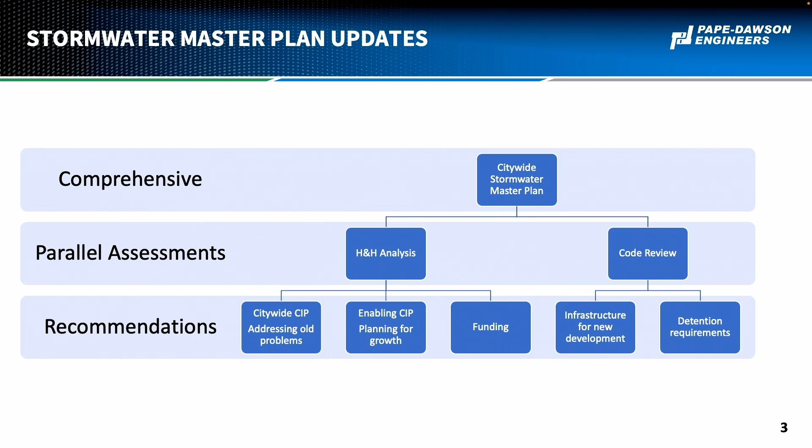But then the bulk of our work was with the actual H&H analysis itself, so that we can address old city problems, put together an approved CIP that can help enable growth, and then can work towards funding. All right, so the method of the H&H analysis varied based on where we were in the city. We looked at issues today, existing conditions, a 10-year build out, and then fully to ultimate conditions.

We identified what for the city of Corpus we called PMAs, or potential mitigation areas. They may be called damage centers or risk areas, depending on what community you're in. But basically, if we say PMA, we're talking about the areas of town where something is apparently at risk today. We'll talk about how we rank those PMAs based on structure flooding and roadway flooding, and then how we develop the capital projects from there.

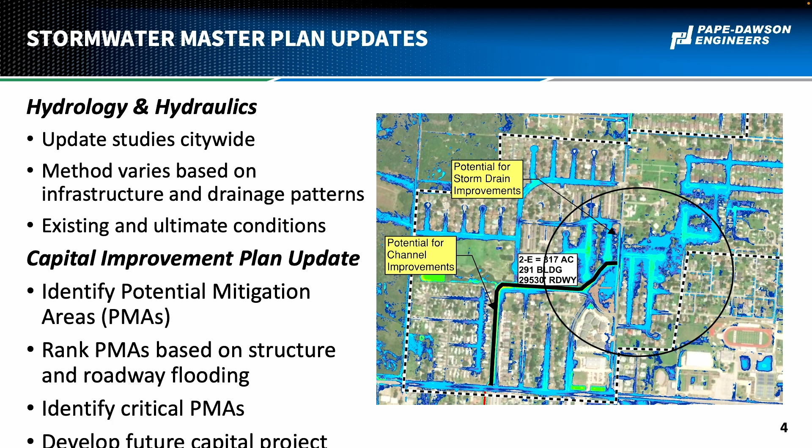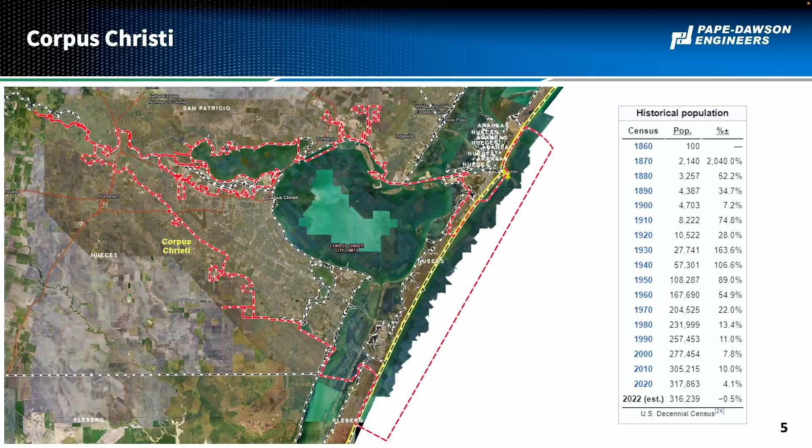Corpus Christi, y'all have heard all about Nueces County a lot today, but there's been pretty healthy growth through the city throughout its history, but that growth has slowed down since the 90s or so. The exact source of what the current growth rate is varies based on who you ask, but it is lower than some of the other cities of its size in Texas and across the country. Over the last few years, and COVID kind of created a hiccup there, but the average growth rate is somewhere between 1% and 2%, 1.6%, I think is where we looked at.

But part of the plan, and these specific percentages are more important for the water, roadway, and wastewater discussion than they are stormwater. But not only do we look at citywide what that growth rate was, but how it broke down by area development plan. And then we looked at data from the MPO and information that the city had and that TxDOT had as far as the changes in trips.

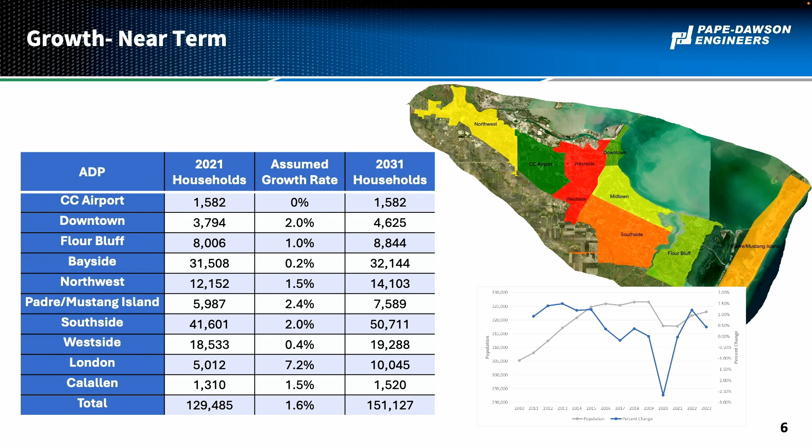And then we coordinated that with the Capital Improvements Advisory Committee, or what we call CIAC. So the CIAC is an appointed body, appointed by the city leadership, that helps guide the process of developing a master plan and developing impact fees. And we went through piece by piece and ADP by ADP to agree on what was a generally acceptable percentage of growth for those areas.

All right. The city is broken up into, I mean, you can carve it up a number of different ways, but we looked at a few different areas. So we've got the downtown area, which is in that darker green area, which we modeled separately.

Actually, we'll start with Oso Creek. So Oso Creek, which has been talked about and what Mr. Hinojosa just asked about, is mostly undeveloped. A lot of the watershed is actually in the city's ETJ. There is some mixed development out there, and there's some infrastructure, but usually it's in the form of ditches, bridges, or culverts. There's not a lot of underground storm drain systems.

Downtown is this dark green area. It's pretty much built out. There is a pump system downtown that gets water over the seawall when it's needed. And then we've got the areas down at the island where there is some development and some infrastructure, but that area is dominated by storm surge.

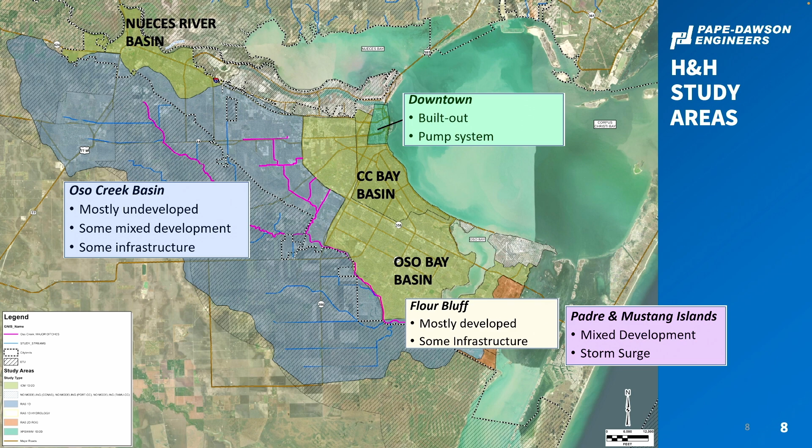Flour Bluff was looked at separately. It is mostly developed. There is some infrastructure, but it doesn't function like the rest of the city because there's not really a riverine component. It's just kind of a bluff. And then the rest of this is Nueces River Basin, Corpus Christi Bay Basin, and Oso Bay Basin. This is the area that is mostly developed and has a lot of underground storm drain infrastructure. So that's how we carved up the project on how we were going to attack the analysis.

And so we used different models. For the Oso Creek Basin, we used HEC-RAS. We used a 1D/2D analysis so we can look at the flow through the creek, but also the overland areas. For the downtown area, we used the XP-SWMM model. That was used because the city already had an XP-SWMM model for that area, and we were just updating it to take into account the new Atlas 14 rainfall.

Next area is down here in Flour Bluff, where there's less infrastructure. We used the rain-on-grid RAS 2D, which is basically just treating the surface like a grid and how the water flows through. We actually ended up confirming a lot of that with our ICM model.

And then for the rest of the area, we used an InfoWorks ICM model. The reason we did that is because that area is, of course, very flat, but there's a lot of underground storm drain infrastructure. Some of it is looped. Some of the outfalls are below sea level. So it's a very complicated system model.

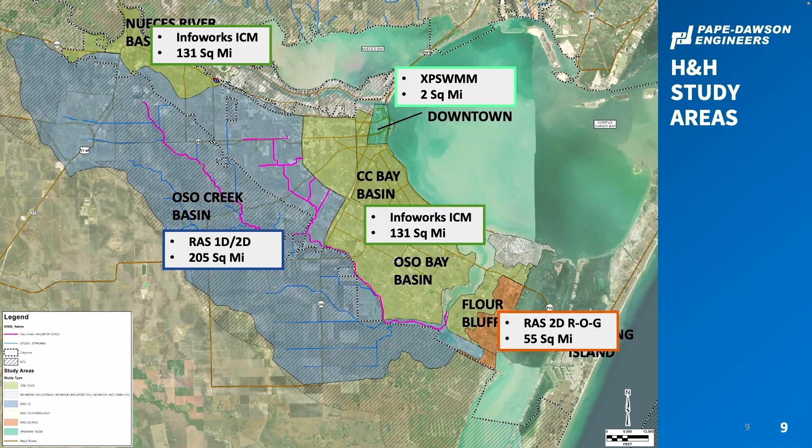In general, we prefer to use the readily available, publicly available models like HEC-RAS, but sometimes, like in this case, we've got to use some of the more advanced systems that are proprietary. So we used a combination of those to best fit the city. And understand, this is a large city with a big ETJ. All of this is scalable. So if your total city is 2 square miles, a smaller version of this can be done. And as other consultants have shown, this can be extrapolated to larger river basins like the Nueces River Basin.

The soils through here are predominantly clay. The purple means clay throughout the entire city, the exception being the island and Flour Bluff, which are of course sandier.

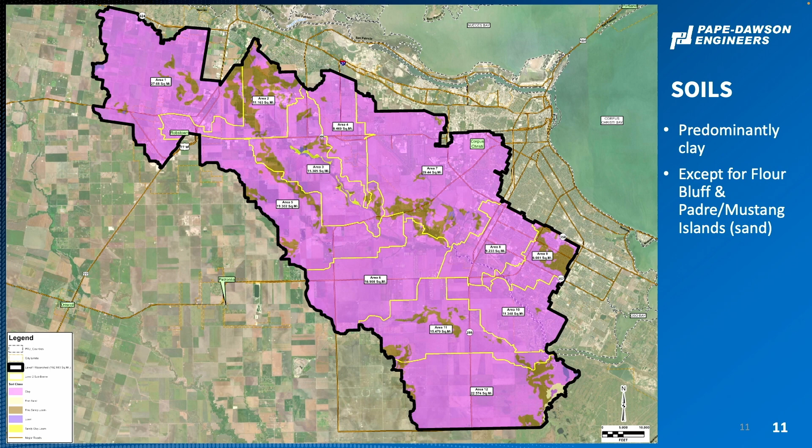We talked about the land use and the growth percentages assumed earlier. For stormwater, we were less concerned about the percentage of growth and really just looking at the assumed values for the current state of development, future development, and ultimate development. And so we started with existing land use. So we did 2 things.

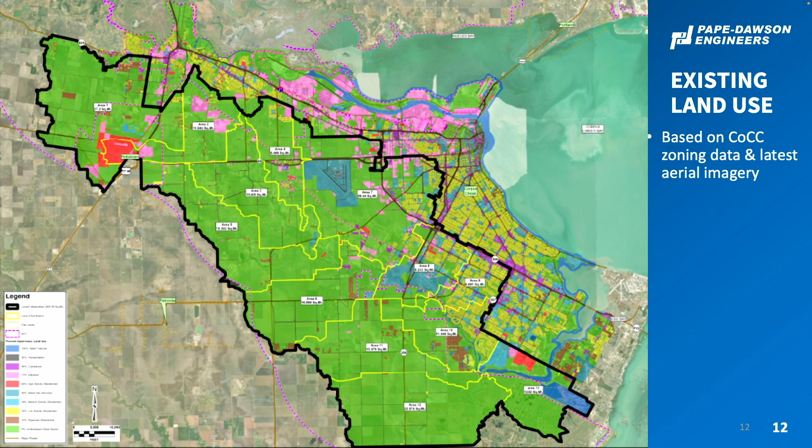We took the city's zoning data, and then we compared that with aerial photography, and where there was zoning that wasn't apparently developed based on the aerial imagery, we took that out and developed this existing conditions land use. This green color that you see is just undeveloped through most of the Oso Creek watershed.

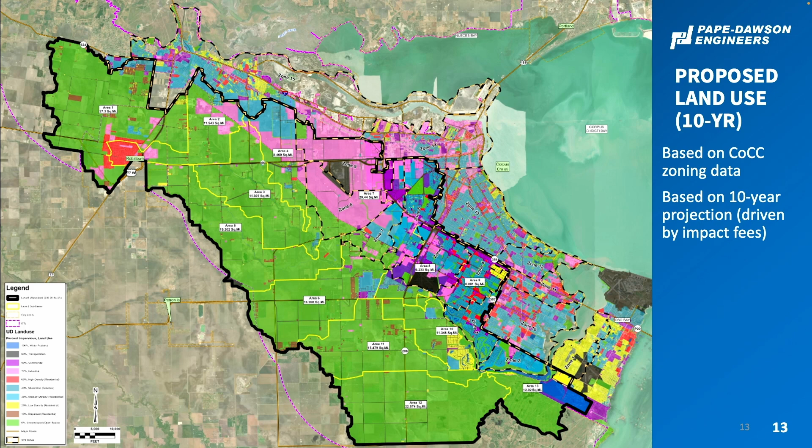The proposed land use, we basically said, well, we need to look at a 10-year proposed land use condition. The reason that we picked 10 years is because that's the time period that's used for the impact fee calculations. So the impact fee is intended to support development or growth over the next 10 years. And so we had to make an assumption of kind of a snapshot. We said, well, we'll just assume that the zoning map within the city limits is the projected 10-year development. And then we also added a few areas that we knew there were some developments coming online through plat data and things of that nature.

Now you might ask, well, what happens if we're over or under on our estimates for the land use? How does that affect the fee? When we get to that, it really doesn't matter for stormwater because it's all about dollars per acre, dollars per square foot of impervious cover. So if the actual growth rate fluctuates more or less than what we projected, it doesn't really affect the rate. It just affects the amount of fees that would be taken in over that amount of time.

For future land use, we did a few things. We looked at some of the corridors where we saw some different commercial and industrial development coming in. We saw some denser residential areas coming in here. We plugged those in where we had a good idea of what was coming. And the rest of the area, we just considered mixed use, which is, I want to say 95% residential, and then a mix of other things. There are some areas, large green areas like the tip of the King Ranch down there, where we safely assume that there's not going to be much development.

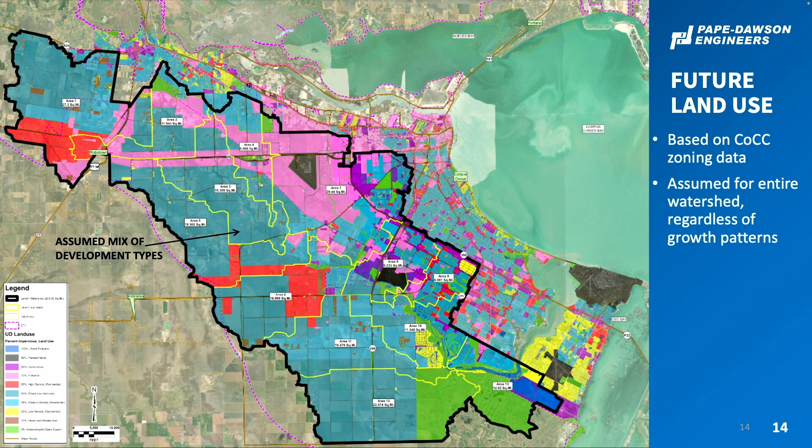Let's talk about how we got to the potential mitigation areas or the damage centers. First thing we did when we met with the city and started our modeling is we wanted to do a high-level analysis. So we did a 2D rain-on-grid analysis of the entire city. We also did this for Flour Bluff and the island, but I just wanted to put one exhibit up here. This is assuming just the topography and no underground storm drain infrastructure. So this is very conservative.

The point of this was to be able to print out a big layout, sit down with staff and say, okay, does this make sense with what you've seen? You guys deal with the calls and the issues of closing roads. Do these areas that show the deepest flooding make sense? And so you went through and said, well, yes, this one makes sense, but there's the pump system here. This one makes sense, but TxDOT's got a project. And so this was just a tool that we were able to model the entire city very quickly, like I said, as a first sniff test.

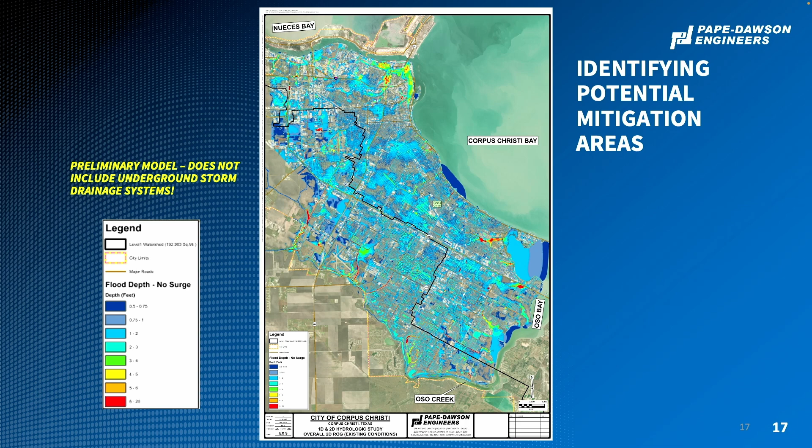As we went through iterating and refining our models, we had to figure out what was the level of risk that we were going to quantify. So the first thing we modeled was the 100-year floodplain, period. So whether it was an inch of water or 6 feet of water, we just counted what all was inundated. And what we found is that when it rains, there's water all over Corpus. And even when we talked to the stakeholders about whether we should take into account a foot of flooding in the roadways, it kind of got chuckled at, and they said, well, that's a pretty decent rainstorm. Maybe let's bring that down so we're not counting so many structures.

So we went through and we looked at different options. We said, well, we can look at a 100-year storm. We can look at a 10-year storm. And instead of looking at the inundation of the entire floodplain, maybe let's truncate that to a certain depth. So we looked at only counting the structures that might be flooded when there's 6 inches of water, and then only counting the structures that might be flooded when there's 12 inches of water, which is what we landed at. We landed at what we call the 10-year 12-inch, which is not a design storm. It's just a way to count structures that are potentially at risk.

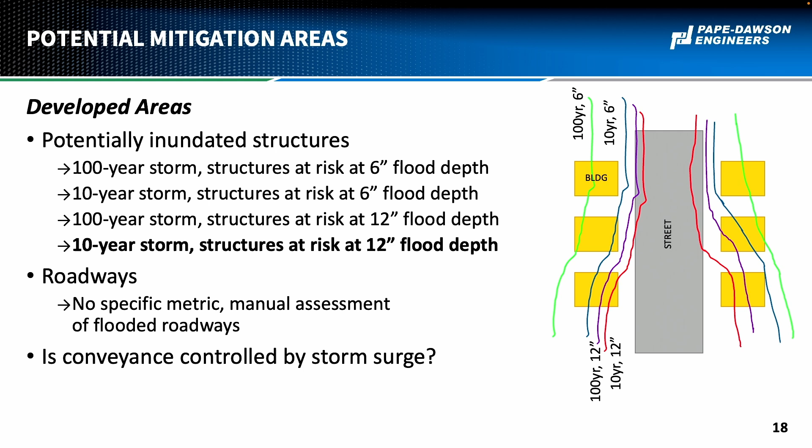And so you'll see some maps later where we'll have some dots on parcels or structures, and that is what's counted there. Now, each community can set their own level of risk here. What's important is that we had a defendable, agreeable metric so we could say, here's the number that we're counting for structures.

If you wanted to make this the 5-year or the 50-year, you would have the same type of metric. On the roadways, we didn't look at a specific metric for flooding of this depth over a lot of time. But when we looked at our modeling, we looked at areas where there was road flooding, and that road flooding might be improved if there's some infrastructure added. So this was kind of a manual assessment. And then we looked at areas to determine whether or not they were controlled by storm surge.

So I want to clarify the 12-inch depth issue. This is just from FEMA's website, their standard picture that says this is a floodplain and this is floodway. And this is me being a 10-year-old drawing houses in the floodplain. So if this blue line is the actual floodplain, we looked at, well, what happens for the houses that are touched only by 6 inches of flooding?

Well, when we do that, we're basically narrowing the width of what we're counting. So if the 100-year floodplain is this wide, and we say 6-inch flooding, we're going to count fewer houses. And if we go to 12-inch flooding, it's going to count fewer houses and structures there. A reasonable question would be, why did you do that? Why did you choose 12 inches?

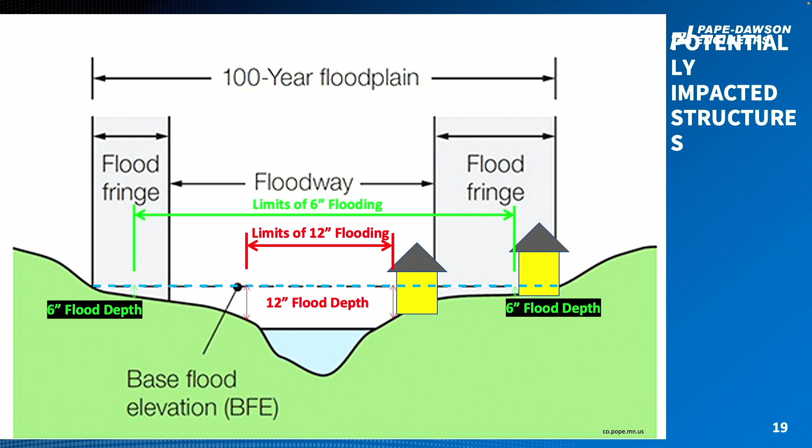When we started talking to the stakeholders about the projects that we were developing, one of the comments was, well, we don't really show any projects down on the islands or even on North Beach. And we said, well, that's true, but what we're looking at with this master plan are projects that can help reduce that risk number.

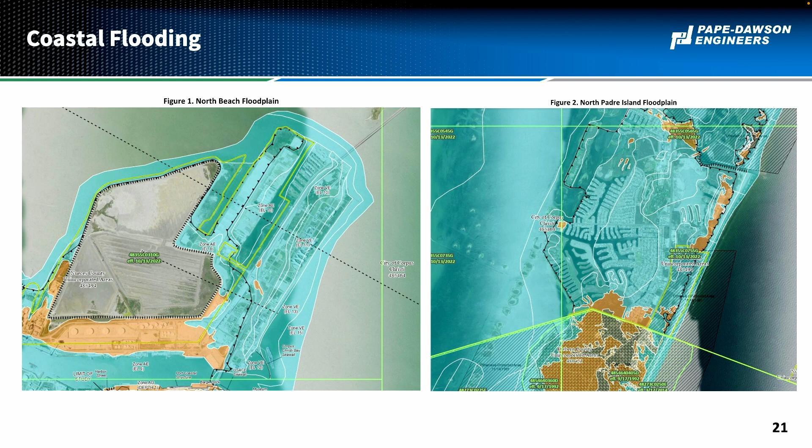And this is just straight from the FEMA maps. You can see the flooding on North Beach and on the islands is really dominated by storm surge. That is not to say that there can't be a maintenance type project by the city that can help with some of the day-to-day flooding. That's still very important. But for the scope of this project, creating a large-scale CIP for the overall city, that was just beyond the threshold of what we were looking at.

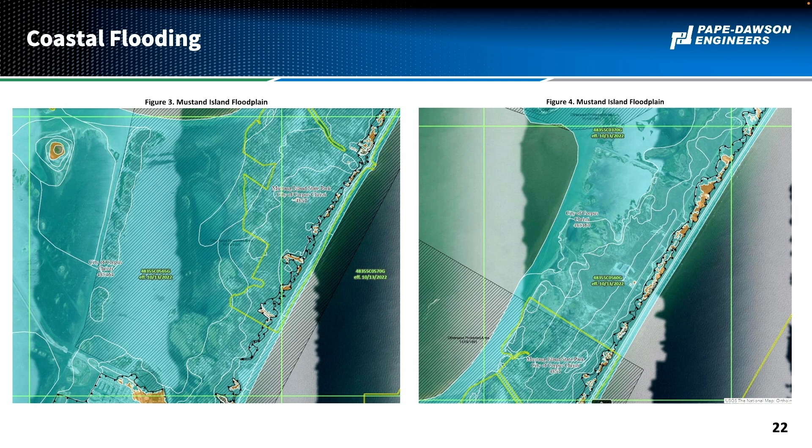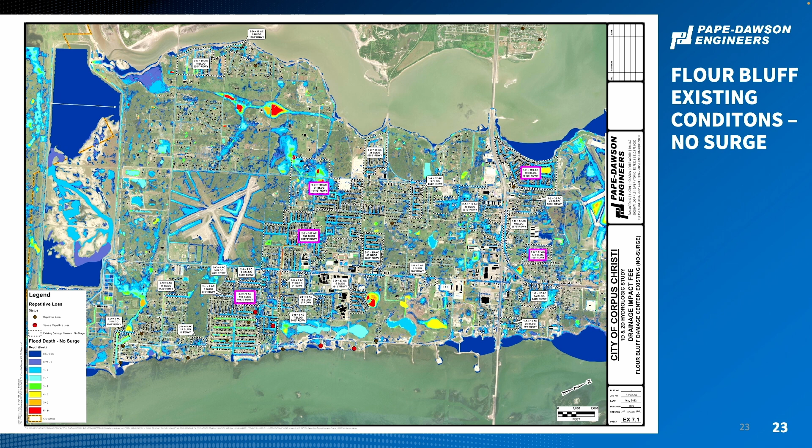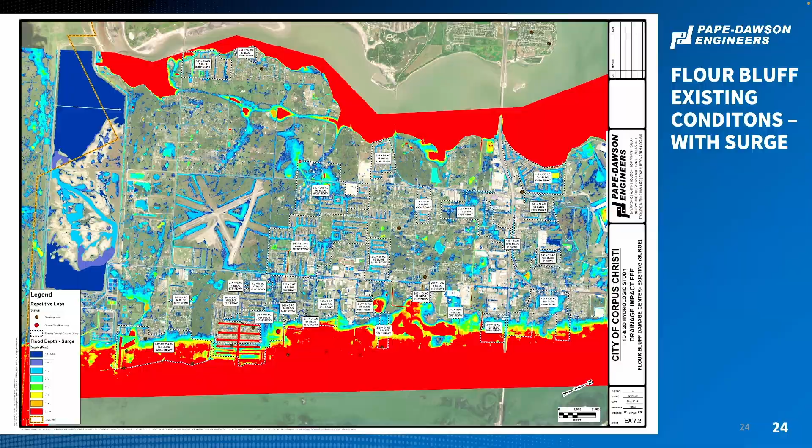And when we added storm surge, there's areas along the coastline of Oso Bay or the Laguna that just aren't necessarily solvable with a standard channel and culvert project. And so we identified that there's some areas that we're not going to be able to help with this project. And taking into account the storm surge also changed the dynamics of the actual studies for the more internal projects that we're looking at.

We spent a lot of time on our InfoWorks ICM model. We broke this up into 15 zones. There's nothing really magic about the number of zones, except that we would spend all day getting the model set up, and before we leave the office, we run, because some of them run for hours and hours, and you hope that the system doesn't twitch while that's going on. So there's definitely some reruns when we got back. So we broke these down so that each version could run within an hour or two. And that got better as we went through.

We talked about needing the ICM model because of all the infrastructure. So we got the city's GIS data for the storm drain systems. All those green and yellow pipes are the storm drains. I believe there's a threshold on the size of the pipe; that's the different colors. But the city data had about 38,000 pipes in it. And there were about 8,700 manholes and inlets that we had to account for.

We worked through, and by we, I mean Anthony Shepis, who did most of this work, went through and consolidated pipes as best we could so that we had the same length of pipe, but basically cut that in a fourth or so to get down to 8,000 pipes and about 5,000 nodes.

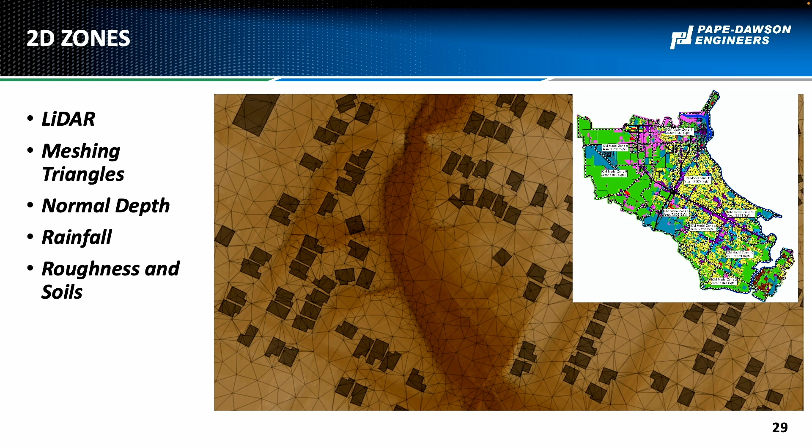And then we had to take into account the houses. There are hundreds of thousands of structures in Corpus Christi, and so we took the footprints from the appraisal district data, and we basically extruded those up out of the surface to be 10 foot tall. And so what that does is it's a conservative way to show that if the water were to touch this building, it would go around it instead of through it, which in reality, in a flood, the water would go through. But again, this creates a conservative approach.

Talk about identifying PMAs. So we've got the blue represents the 10-year storm where there's 12 inches of flooding, and the black is all the building footprints. And so we went through, and if the building footprint touched that delineation, we counted it. If for some reason we didn't have a building footprint, if the center of the parcel was within that flooding, we counted it, and that's how we got our existing condition structures.

And this is just zooming out a little bit to see, we ended up with a lot of structures counted just kind of on the southeast edge of town.

As we started, we went through several iterations of doing improvements. The first thing we did was very simple. The way the model runs, it says there is one 48-inch pipe, and it's really easy to say switch 1 to 2, or 2 to 4, or whatever it is. So our first sensitivity analysis was, let's double the size of the storm drain to see where it makes a difference. Easy check. That was not our final analysis, but it was a way to do a quick check with such a large watershed. And then from there, we massaged it and iterated it.

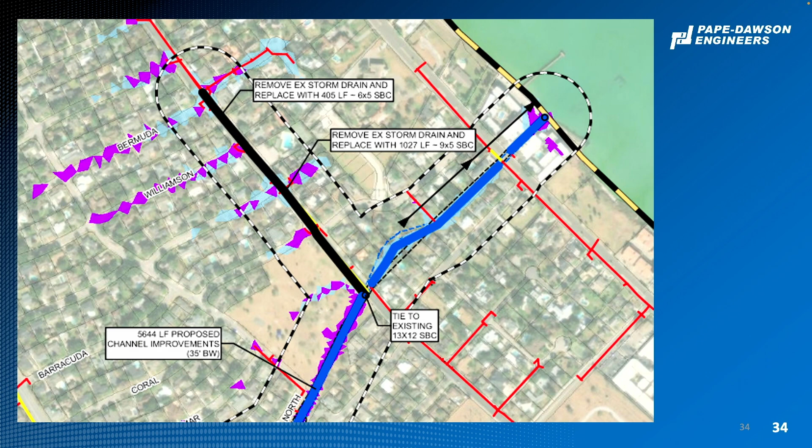Here's an example of a pretty big system that could be broken up into multiple smaller systems. So this is a channel system that runs southwest down to Oso Creek, and then some of the culvert and storm drain improvements that can be made, and you can see some changes in flooding there.

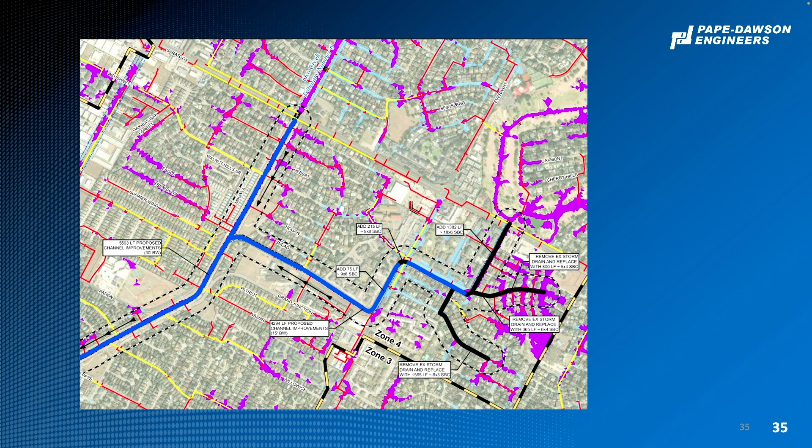And then this is another set. We had to take into account improvements around TxDOT. We've got some storm drain improvements. This actually drains to the north and goes towards downtown. With this type of situation, we made sure and put our improvements into our other models where we look at things like the downtown pump stations to make sure that we didn't add too much water to the system and have an adverse impact.

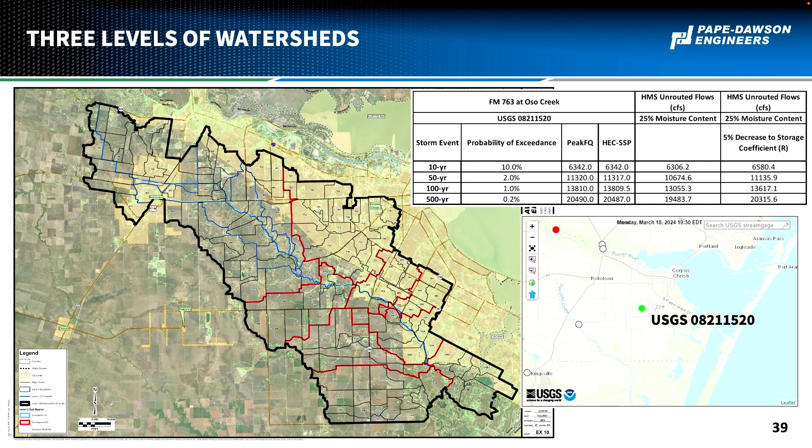When we're setting up our Oso Creek analysis, again, most of the infrastructure out there is just ditches and bridges and culverts. We didn't have money to survey any of the structures, so we used a program called EagleView. It's a subscription-based software program, really a website where you can actually measure vertical distances and areas on vertical planes.

And so you can get these isometric views of these bridges and come here and say, all right, that's about 15 feet. Now, it's not survey accurate, and it's hard. There's a point where it doesn't really work well on tiny outfalls, but it's a good way to gauge whether or not the models we're working with are in reason and what we needed to actually go field check.

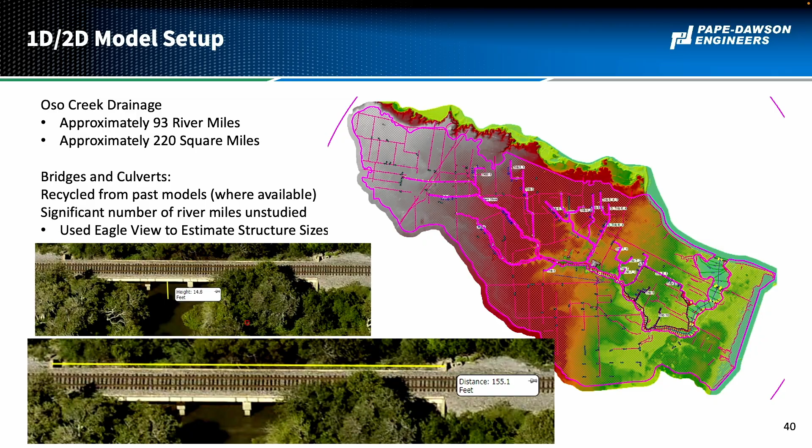Our modeling for Oso Creek, actually, this project was going on right after the AECOM pilot study. So that model was what was used as our baseline for this Oso Creek study, and then we expanded. We went into a little bit more detail with some of our crossings and structures from there.

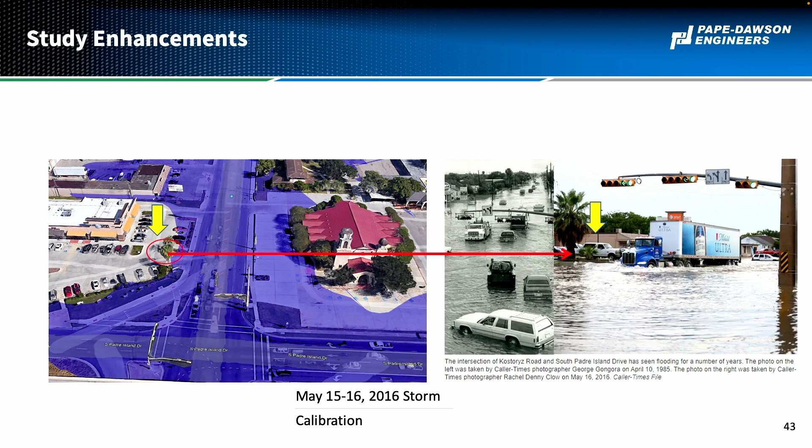What we saw when we started looking at the patterns from the hydraulics in Oso Creek is that the portion of the creek that's within the city, the developed area, gets to and through the creek in about 18 hours. The portion of the creek that is outside of the city takes about 30 hours. So that means that developed water basically gets through the creek into the bay before everything upstream.

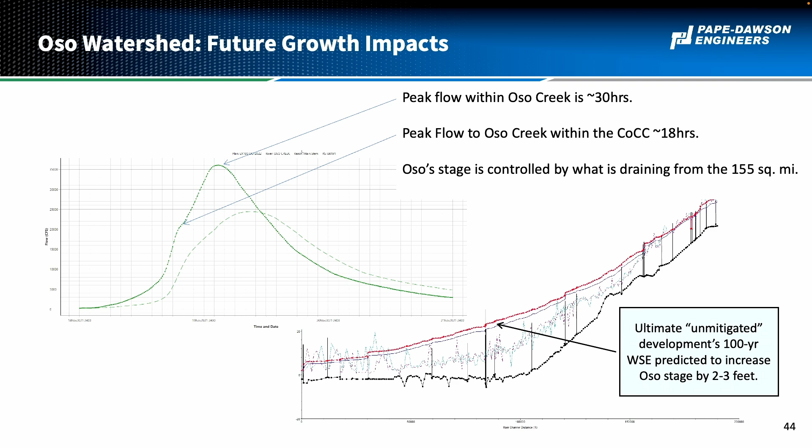So where this is important is, one of the questions with the code side was, how do we handle detention? Well, the city's IDM already says that you can't increase flow or impact your downstream neighbor. And so this reconfirmed that in the undeveloped areas, moving forward, there needs to be detention with that development.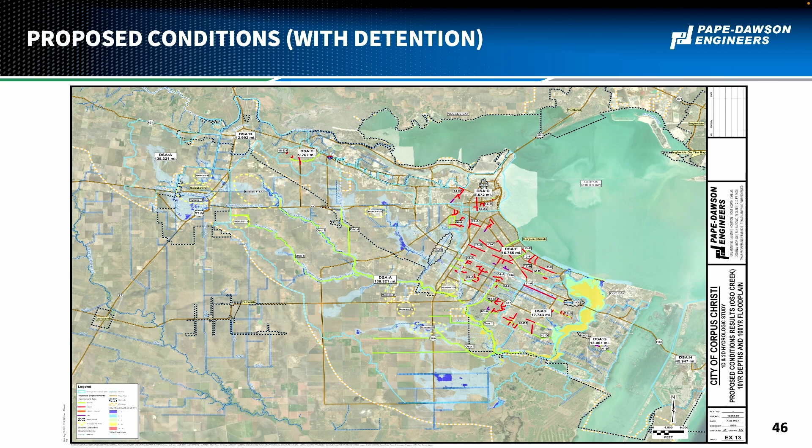The city actually recently got funding for the Oso Creek bottom rectification, which is the bottom 12 miles of the channel. And part of that is going to dive deep into the actual design of those improvements. In that, we've got to look at what are we going to do? What's the maintenance plan moving forward to make sure that the city spends this money that it got from the Water Development Board? Let's make sure that the money was put to good use.

Now, again, we started out with dozens and dozens of projects and then whittled down to 29 projects. Each of these projects could be broken down into much smaller projects. So 29 could easily be 100 or 150, however you wanted to break them down. 24 of those are in the developed areas, and then there's 5 large projects in the undeveloped areas.

One other thing I wanted to point out is that there was also the Tri-County study going on at the same time as our study, which was Nueces, Jim Wells, and Kleberg County. And so we talked to the Nueces County engineering consultant, and we heard it from city staff. They heard it from county staff and leadership that says, hey, we realize there's 2 overlapping studies. Please, let's try to do this efficiently. So we met regularly with those engineers to coordinate our studies.

And so geographically, there was overlap in our studies. But when we both said, hey, here's a project, we divvied that up to make sure, okay, if it's in the city limits, Pape-Dawson will take care of it. If it's outside of the city limits, Halff will take care of it. And that was kind of how we divvied it up.

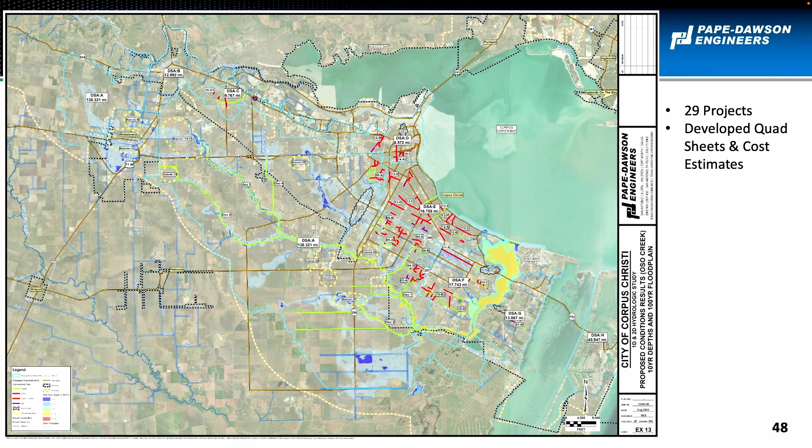A good example of that is this project here. You can't read the number, but that dashed yellow area is called Nueces 28. That's an area that the county identified, that we identified, and sure enough, TxDOT is already working on plans to bridge that floodplain. And so we pretty cleanly said, okay, the city project will be east of Crosstown, the county project will be west of Crosstown, and TxDOT's project will be Crosstown. So it was a way that the communication actually worked out.

Now, for each of these, we developed what we call a quad sheet, which I believe prints out to 11 by 17, just basically a summary document. So this is what we call the Oso 1 project. It lines up with the Oso Creek project that is now already funded. And this is just kind of a guidance document that helps the budget process that's got all your vital information.

So it's got the thick line of where the project is. It says this is this many feet of proposed channel, this wide. It's not a construction drawing, but it just lets us know what's going on. It's got a brief description of the project. We've got the council districts listed, the precincts listed, and some possible funding sources that could fund this in the future. And then we've got our cost estimates, basic construction, right-of-way, mobilization, contingency, design, and inspection, all to kind of a bottom line. And we did this for each project.

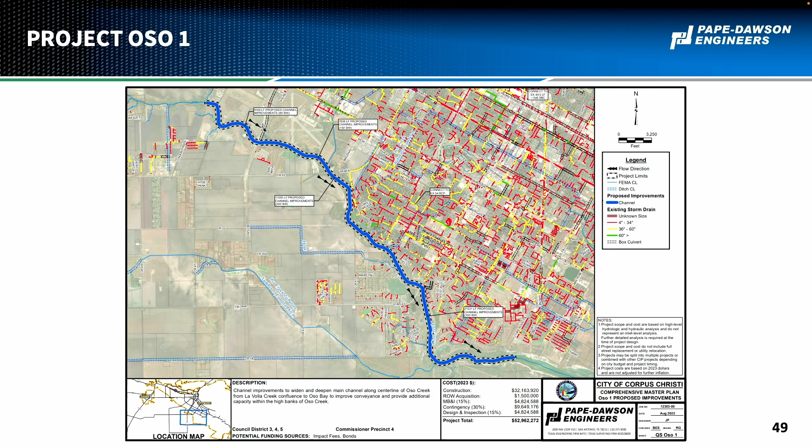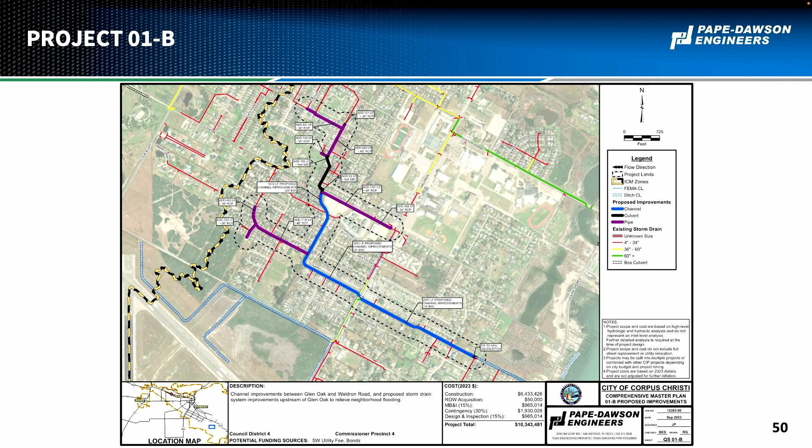This is in the undeveloped area. This is one from the more developed area. We've got a combination of storm drain and channel improvements. And this is also a smaller project compared to that other one. This is about $10 million, but again, could be broken up into smaller $1 million, $500,000 projects. Each of these got its own cost breakdown.

For that large undeveloped project, it was a very simple estimate because it really is a matter of excavation. And then we've got some standard percentages assumed for utility adjustments and things like that. Where we get into the developed areas, it gets a little more complicated because we're looking at different pipe sizes. There's more need for trench excavation protection, flowable backfill, things like that go into those estimates, right-of-way acquisition, but we did this for each of the projects.

Here is the full, geez, that's a big spreadsheet. These are the full list of projects. So we ended up with, again, 29 projects ranging from, say, $6 million to $60 million, with a total of $697 million for the CIP. So the 29 projects and the costs associated with them, these have been approved. They were approved this spring.

This dollar in no way locks the city into spending any money. It is a number there for planning purposes so they can move forward with funding as needed. And again, these projects can be broken down.

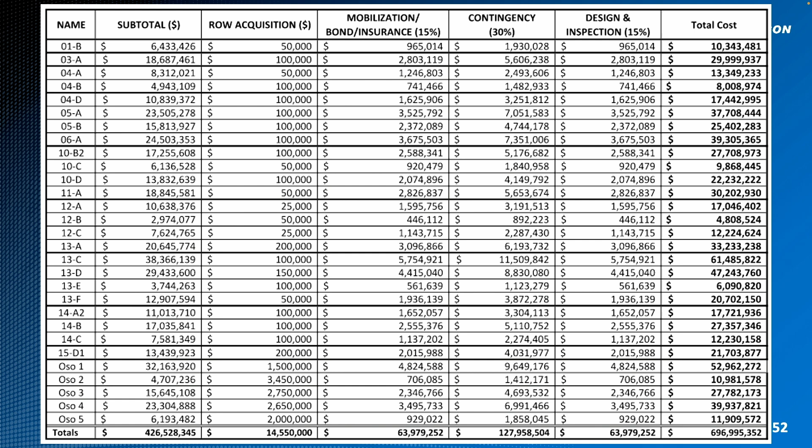We also looked at the risk and the cost versus the risk, or the cost benefit. And so we had those inundated structures existing and proposed. And we narrowed the number of structures that we counted to only where there was 12 inches of water. So that's why these numbers are in the hundreds and maybe not in the thousands in some areas. And then we just ranked them: basically take the dollars, divide by the reduced risk, and that's how we rank those projects. And these are the 24 projects within the city developed area.

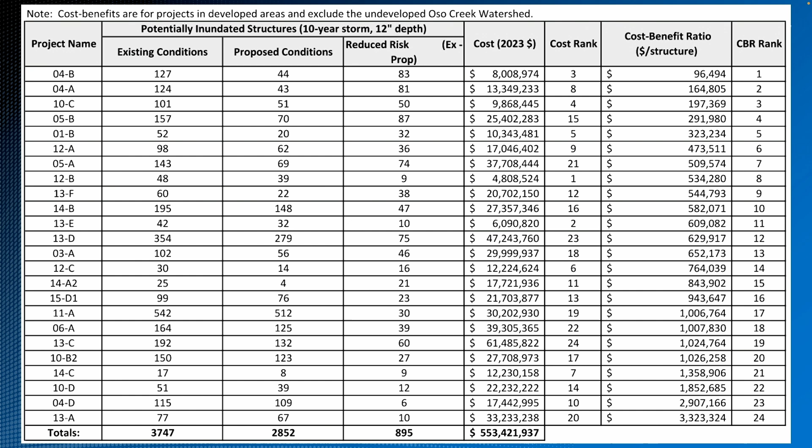The 5 projects here are the ones in Oso Creek. These are the ones that are dependent on development, and these 5 are the only projects that we used for our impact fee analysis. So those 5 projects totaled $143 million. If you don't have impact fees and you're implementing impact fees, the state has guidelines about what portion the city can pay, what the burden on the developers is.

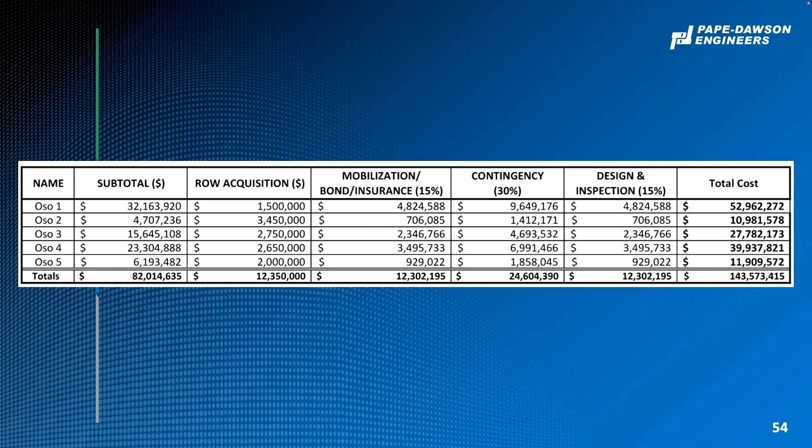And so there's a couple different ways to do it. The simple way is that when we start our impact fee calculations, we take this total number and we divide it by 2. And so the project cost is $143 million. When we step into the impact fee discussion, we divide that by 2, it's about $70 million.

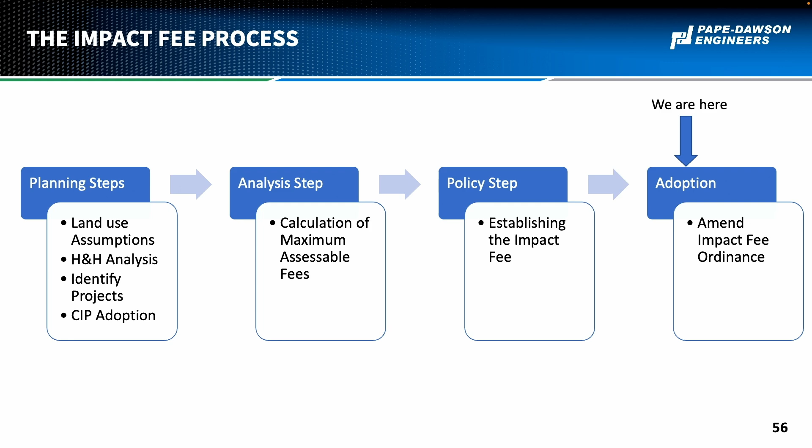The impact fee process starts with all the planning that we talked about, the analysis that we've done, the policy for establishing the impact fee that we have worked on. And when I say establishing, I mean calculating, and now we're in the adoption. So the impact fee has received a recommendation for approval from SEAC with some conditions. We're now going through public workshops. We met with Planning Commission last week or 2 ago, and council is next. And so we'll work through that so that we can hopefully get to an adopted fee.

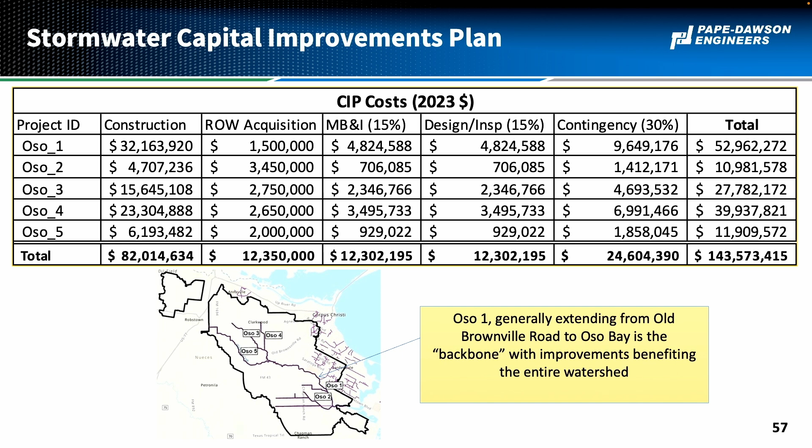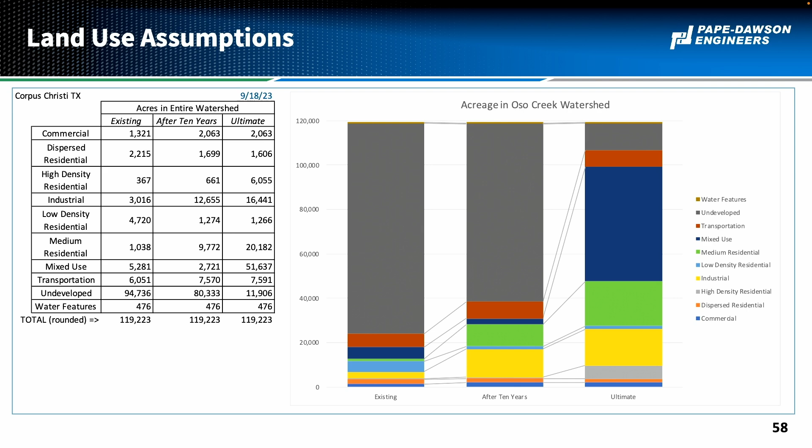So you've seen this number already. Take this 143 divided by 2, and that's your numerator. And then we convert the land use assumptions that we did into impervious cover, so concrete, rooftops, pavement, and that is your denominator. You take your dollars divided by impervious cover, and you end up with an estimated fee. We looked at different options, and I'll just kind of flip through these.

The first option was, by state law, the impact fees have to be collected and used within their service area. And generally the service area for drainage is within the watershed. So option 1 was, let's make Oso Creek one big watershed, one big service area with 5 projects. So it's just dollars divided by impervious cover.

The SEAC is a committee that's a mix of folks. Some are developers, some are not. So we have very varying opinions on there about where the fees should be. And so when you start talking about how to divvy up the service area, you start looking at questions of equity. Well, if we have too many service areas, are we now making fees too costly in one area? If we have one big service area, are we subsidizing the cost across the entire service area? And those are really policy decisions, but we looked at some options.

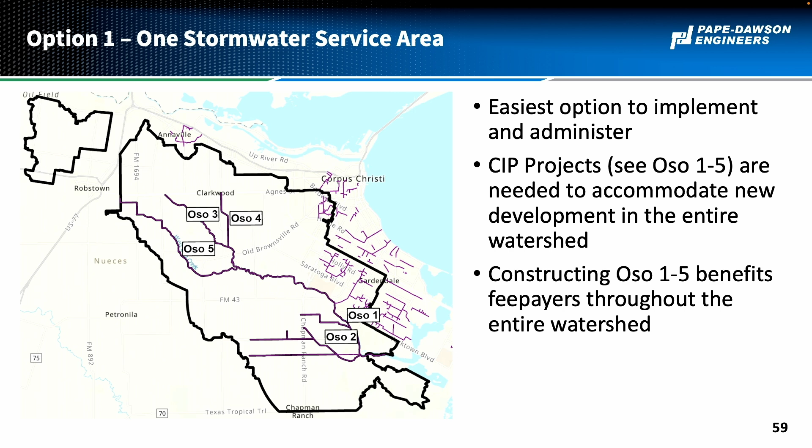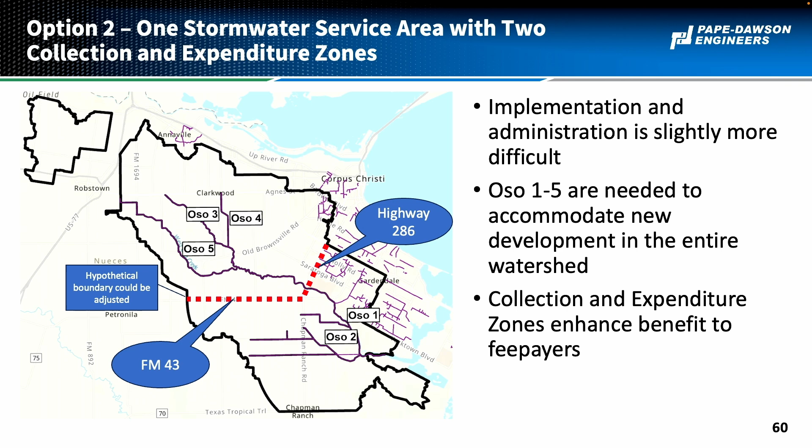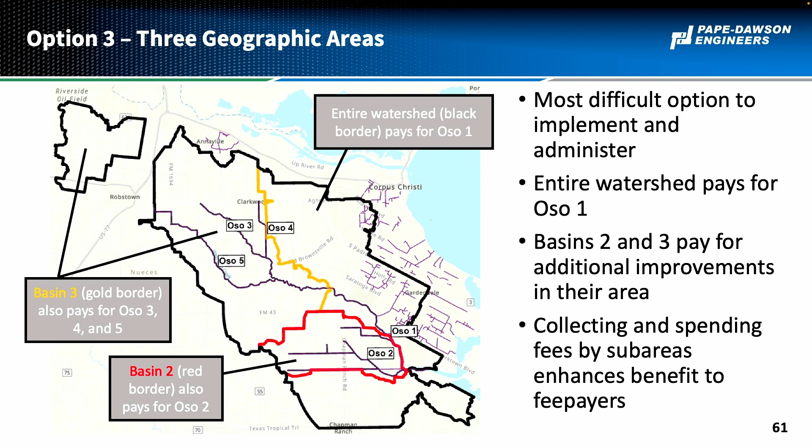So 1 is just one service area. 2 is one service area with just a delineation, so everything collected north of here goes to projects north of here, everything collected south of here goes to projects south of here. And the third option is actually breaking this down into multiple service areas, and to say, okay, everybody pays for Oso 1, and then some people also pay for 2, some people pay for 3. And we end up with different cost options.

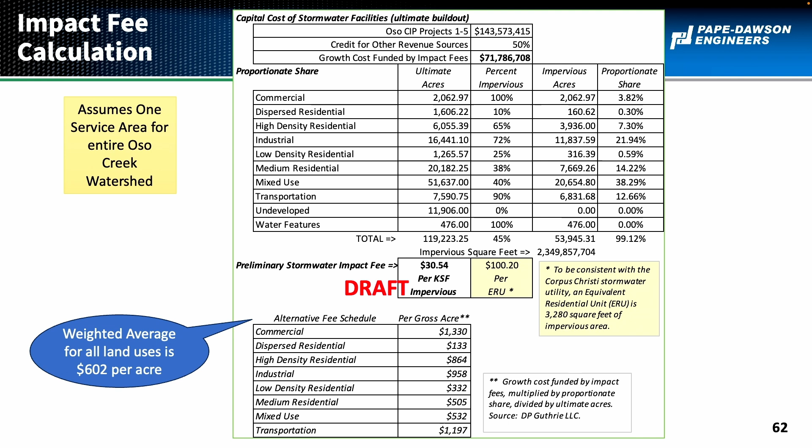So our option 1, which is our dollars divided by impervious cover, ends up being a little over $30 per 1,000 square feet of impervious cover, which equates to about $100 and some change per residential lot. Summarizing what that looked like with our recommendations to SEAC: again, our first recommendation was option 1, $30 per 1,000 square feet. Option 2 was that, but with the collection zones. Option 3 varies, and that fee would be between $10 and $40 per service area.

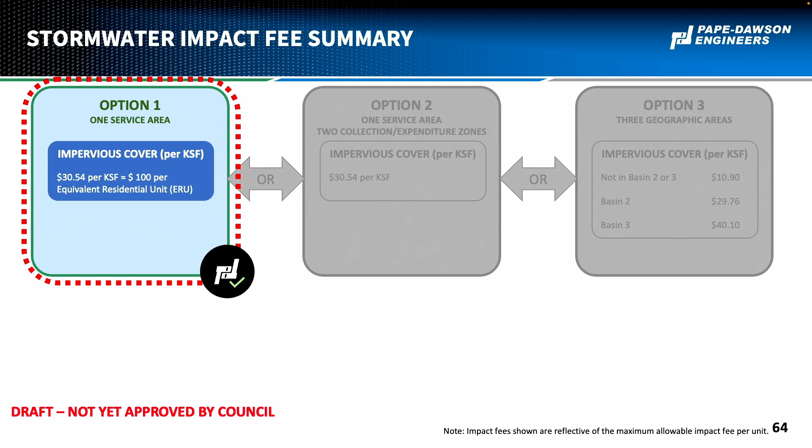We ended up going with the recommendation of the single service area, which is about $100 per equivalent residential unit. Here's that big draft, to be crystal clear. This has not yet been approved by council.

When we presented that to CIAC, they made their recommendations, and they wanted to simplify some things. So one, instead of it being $100.20, they said, let's just call it $100, and let's just say $100 per residential lot. And so that was what was recommended. Instead of having a per impervious cover, it was just per lot. And that is what is moving forward as a recommendation to council.

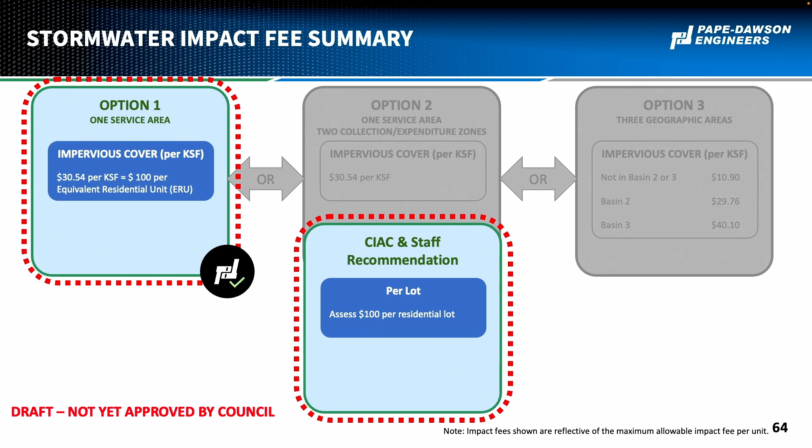Compared that to different other cities, so we're at about $100 per lot. City of Portland is higher than that. Port Aransas is higher than us. It's proposed, but the range is expected to be $250 to $500. We're similar to Willow Park and a little higher than Houston. And so it kind of depends very much where you're at in the state with what that looks like.

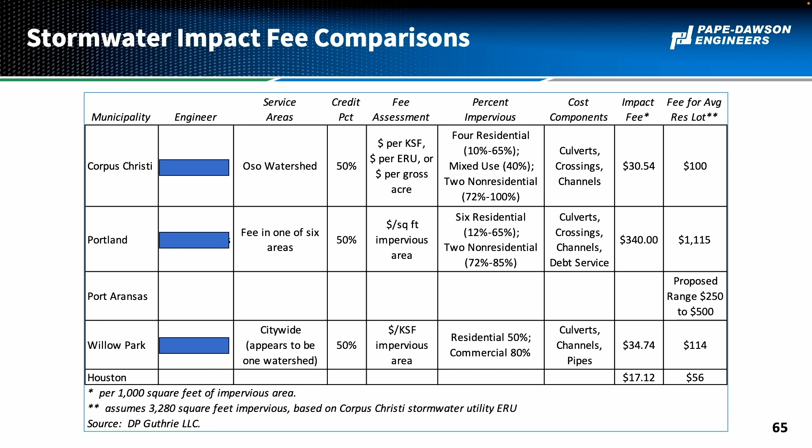And with that, we've talked about going through the entire H&H process, and we ended up with an approved CIP that has 24 projects the city can use to plan for bond programs and year-to-year CIP. We've got these 5, what we call master thoroughfare channel projects that guide the impact fees. We confirmed the detention requirement for developments, and then we gave impact fee estimations.

And then one thing that I want to point out, so the impact fees will go to council in, I think, the 3rd week of July. Should those get approved, state mandates that there is a 12-month period between the time that the fees are adopted and the time that they're implemented. A lot of that has to do with the policies that go along with it, which the city is working on. There's time to sort that out.

You got to build runway in the development process and make sure if there's other city processes that they can be adjusted. We're actually extending that time based on input from the CIAC, so it'll be closer to 15 or 18 months to push that out for adoption and implementation. And with that, open any questions.

First, anybody any questions from the audience? Before I started with reading the list. All right. So on the quad sheet, the bottom center of the block says that potential funding sources are impact fees and bonds. Were other funding sources considered, such as low interest loans, grants, etc.? So they were. We didn't dive deep into the specifics of those, but where they made sense, we did say this is an area you could get state or federal funds. We didn't identify specifics. Okay.